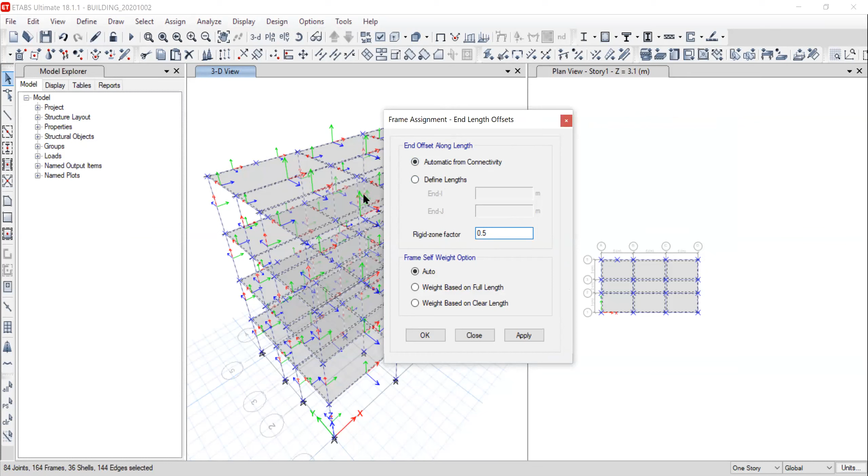Select all, go to assign, frame, then end length offset. Here you have different options: automatic from connectivity, or define length. We are going to consider automatic from connectivity, and then the rigid zone factor, whatever you want to consider. If you want to assign this end offset only for column, select only column. If for beam, select only beams. If for both beams and columns, select both, and then whatever rigid zone factor you want to apply, put it here and say apply.

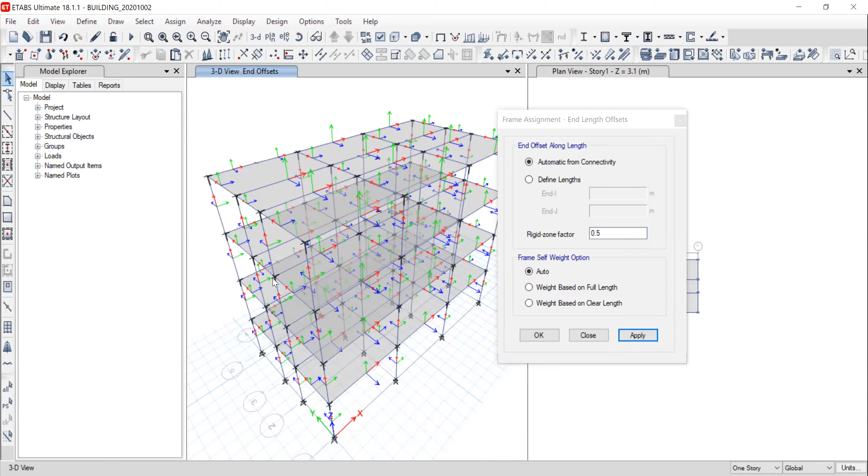So you can see these rigid zones are defined here. I hope that clears your doubt. Next I'm going to show how ETABS has assembled the joint masses. So go run this analysis.

Once analysis is done, go to display, show table. In show table, you will see analysis result, and in analysis result, you will have joint output, and in joint output, there is the assembled joint masses option. So you select that and click OK. You will see the assembled joint masses are provided here in a table. Then you can export this to Excel.

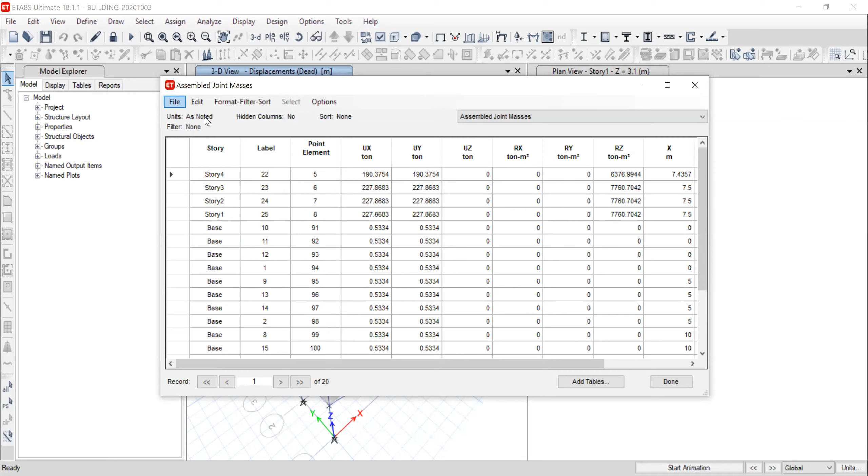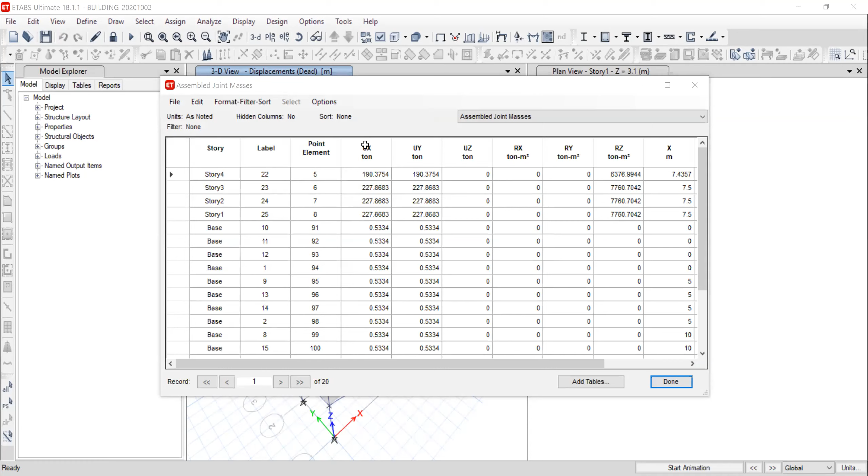Now it is exported to Excel. Let me share that Excel screen. You can see this assembled joint masses at different stories, like story 4, 3, 2, 1, and at base. Because at base we have supports, so at base this mass is assembled at every support. The values provided are in tons, so we can convert that into kilonewton by multiplying by 10. So these values are in kilonewton now, and you can see the mass in x and y direction is the same.

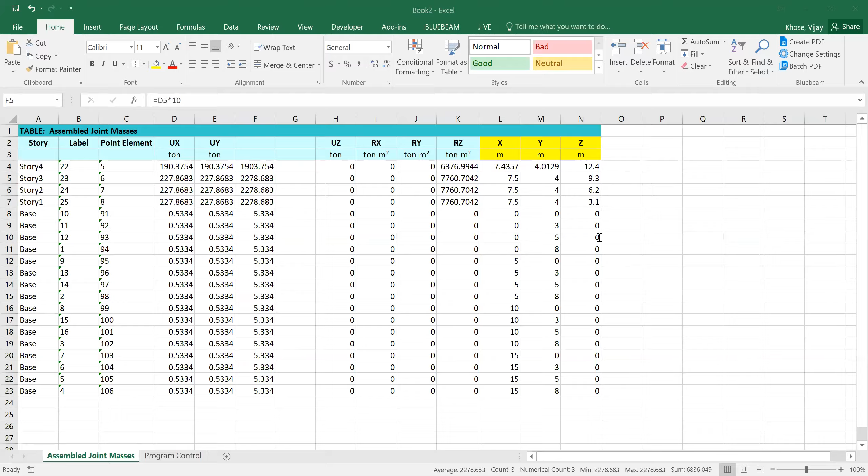So this is your lump mass at the top level at story 4, which is 1903 kN, and at other stories it's 2278.68 kilonewton. If we go to our screen, you can see that at top level it is 1903 kilonewton, and at other three levels it is 2197.22.

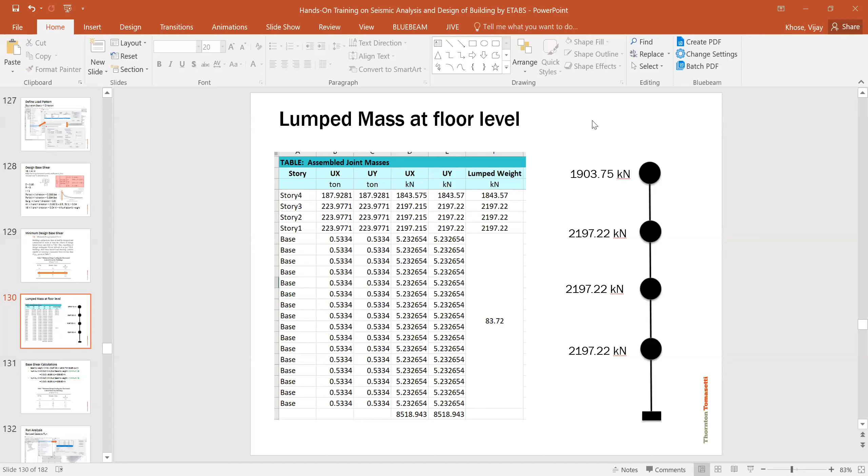So the next thing we have to do is calculate base shear. From here we got how much base shear in terms of a percentage of seismic weight there is.

So we know 4%. Now we also know the seismic weight. Seismic weight is 3 times 2197.22, that is mass lumped at story 1, 2, and 3. And the last one is 1903.75, that is weight at story 4. So total seismic weight is 8495.41.

339.82 kilonewton in x direction, and similarly in y direction we will get this. So this was based on hand calculation. So we know our base shear is 339.82. Now let's go to ETABS.

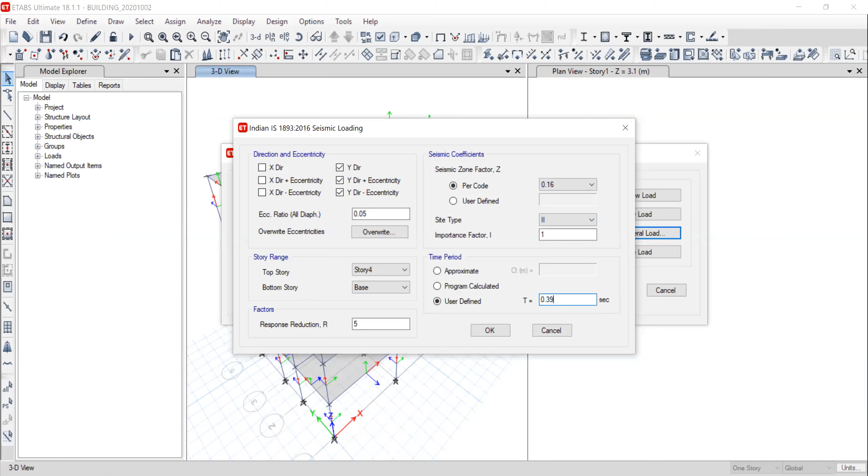Okay, so the equivalent static load case we have defined. Let us run the analysis.

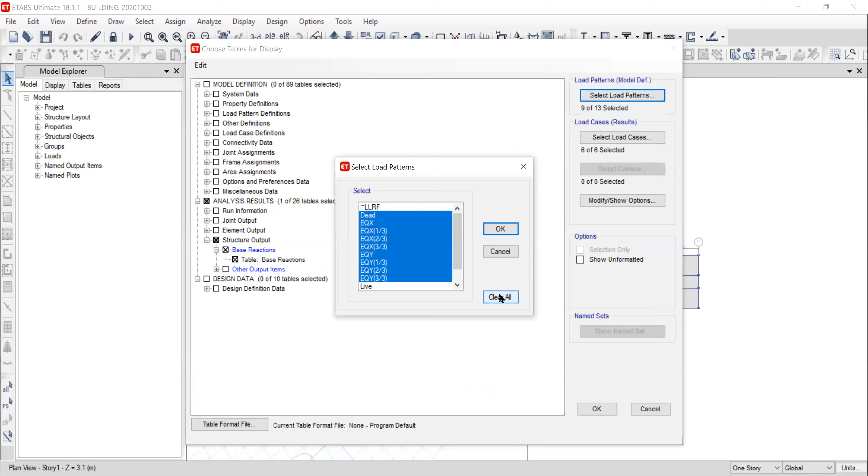Now go to display, show table. In show table, in analysis results, you can go for structure output and base reactions. So base reactions, we are interested in getting reactions for this earthquake in X direction and Y direction.

So here you can see the equivalent static load case in X direction, we are getting 342.83, and as per hand calculation we got around 339, so we are very close. The base shear we are getting due to equivalent static analysis is this in X direction and Y direction. Both values are matching, since there is no change as per hand calc also. So we are good.

So the next step is to distribute this load on the floor level. We calculated this value as a whole, but we have to distribute this load on the floors. So how is the code asking us to do that?

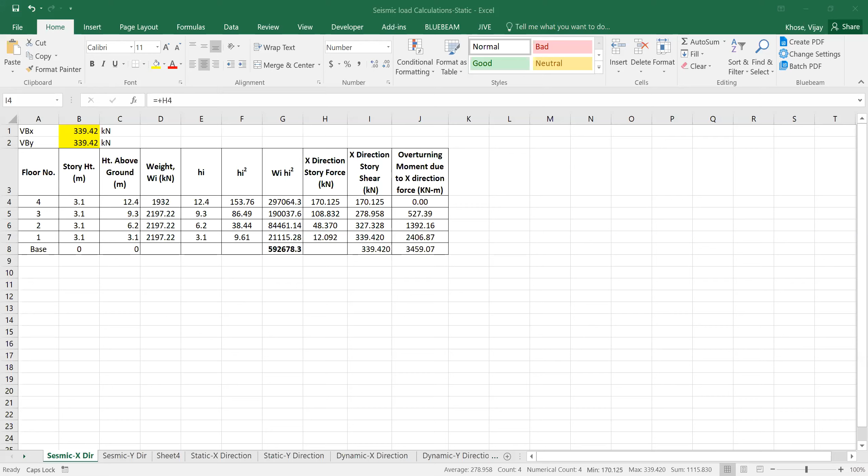Sir, excuse me, that screen is not visible. No, okay, sorry. So go to, sorry, go to display. Now you can see display. Show table. Let me know in case you are not seeing screen.

So I am keep switching screens. So go to analysis result, then in structure output, story forces, and here select only 2 load cases that we are interested in. So you will get that here. You can see the forces are given at top and bottom.

So I am just selecting bottom, and here load case X only, and the story number I'll say. The step number I am not filtering now, but you can see it's 167, and based on hand calculation we are getting similar value 167, 280, 330 and 342. So similar, very close value we are getting.

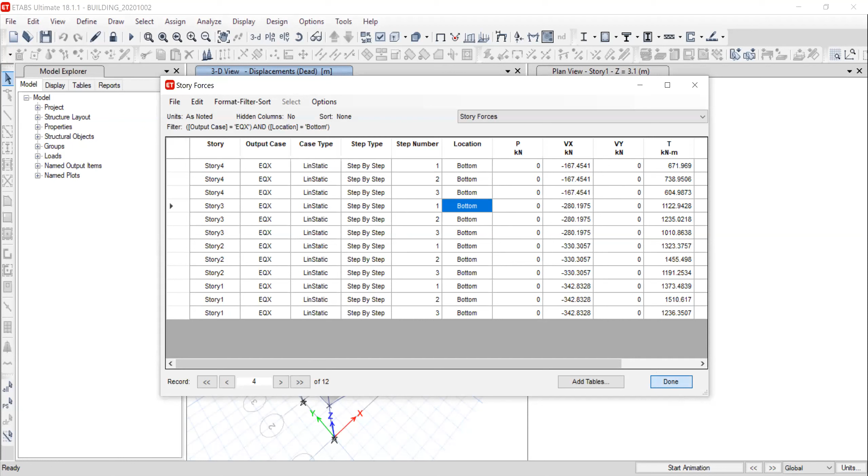So we are good to go. This calculation will be similar for X and Y direction. So this was about the equivalent static method and how force is calculated using equivalent static method and how it is distributed along the height.

So the next is we have to go for the response spectrum analysis. If you see the code, basically the difference between the equivalent static method and the response spectrum method is in the response spectrum you are considering multiple modes, and in equivalent static method you are considering only one mode, like first period. In X direction what is the first period, and in Y direction what is the first period. So that only we are considering, but here we are considering multiple modes.

So the question comes like how many modes we should consider. The code says you consider modes where we have 90% seismic mass participation. So how we can check this?

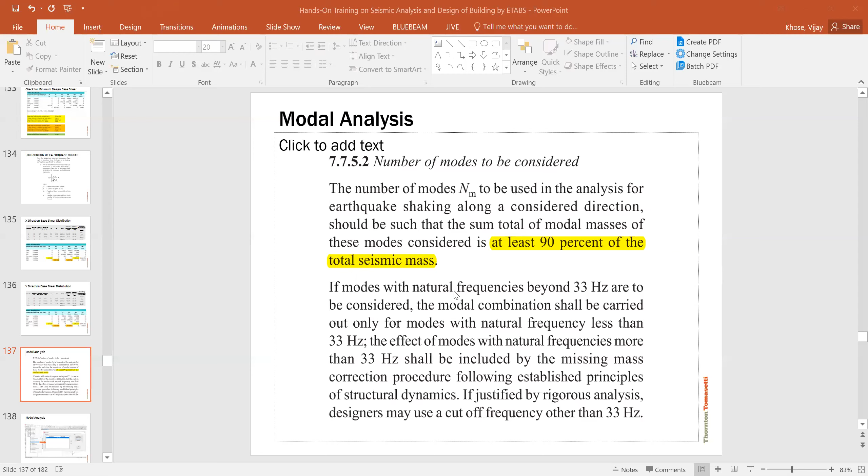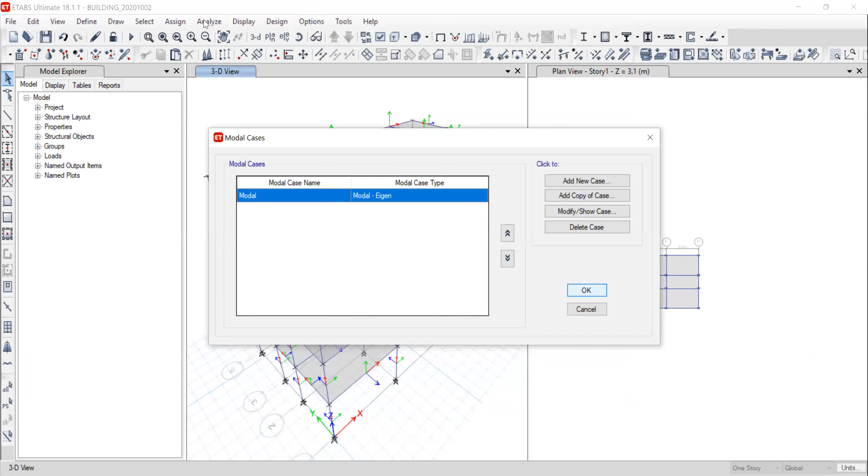Go to ETABS, and here we have to unlock the model. Now go to define, and here you have modal cases. In modal cases, you can see the maximum number of modes. Currently by default it is 12 number of modes. So now we are going to run modal analysis. Go to analyze, set analysis cases to run, and switch on the modal case. So now we can run that.

Once analysis is run, go to display, show table, and in show table in structure output, modal information. So you can see the modal participating mass ratios. Click OK. Here modal participating mass ratios, you will get this number. You can just export it to Excel.

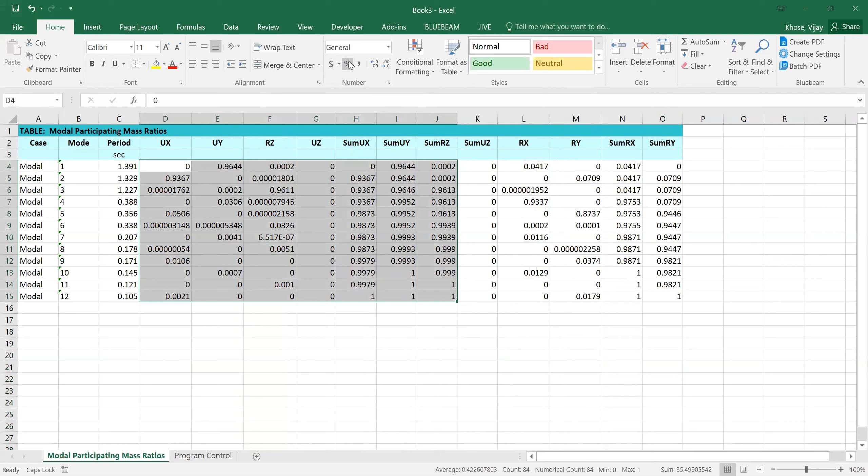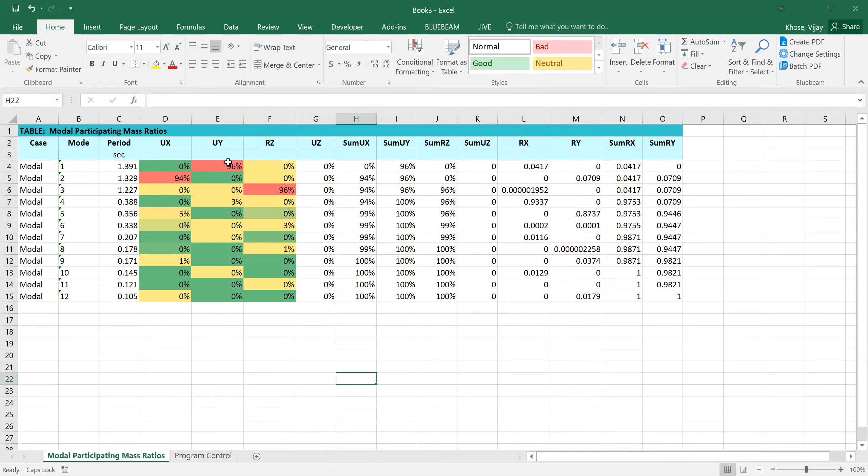So in Excel, here you can see UX participation in X direction, participation in Y direction, and participation in Z direction. So I simply click to this percentage and we can see here I have the participation. The first mode is in Y direction, so participation is 96%. In mode 2 we have 94% participation, and the third mode, that is torsional, that also has 96% participation.

So this way you can see how many modes you require. So whatever modes we have considered, like 12 modes, those modes are good enough. So next one.

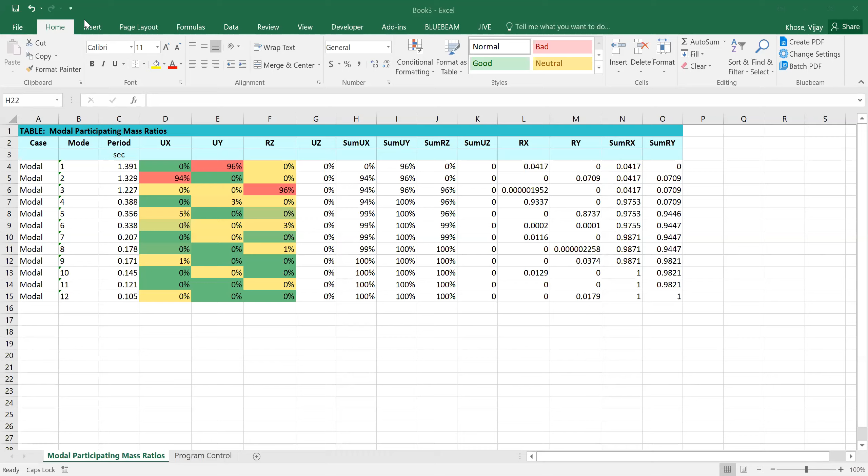So the next step would be to define the response spectrum case. Just unlock model, go to define. In define load cases, we need to go. In load cases, add new load case. So here response spectrum in X direction. In load case type, I can select response spectrum, then add acceleration.

So in X direction, here this is joint U1, U2, U3. The joint local axis is U1 in X, U2 in Y, and U3 in UZ. So here we are doing X, so U1, and here the response spectrum function we define like IS1893 soil type 2, and scale factor should be Z by 2 into I by R.

Just a minute, I will explain this scale factor. This is a very important point. The scale factor has a unit of acceleration and should be consistent with length units currently in use. So you have to ensure which unit you are using, whether meter or mm.

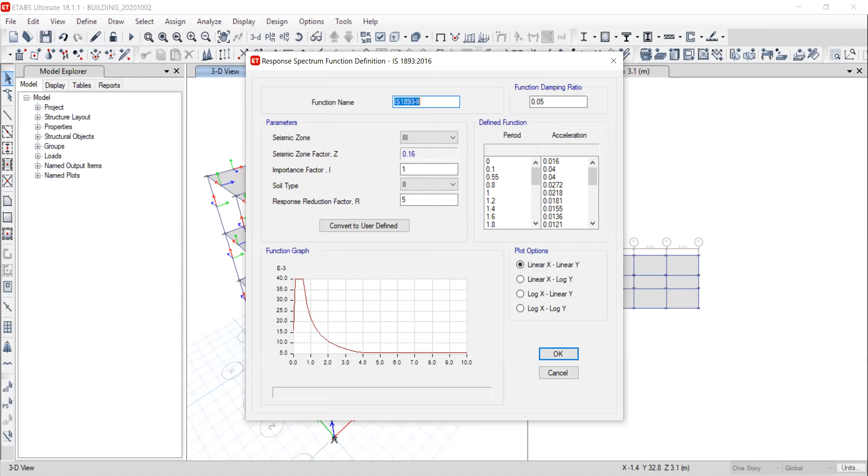So these values are automatically considered here. So we have to only apply this unit, whatever unit you have considered, that length unit, mm or meter. Based on that only we have to apply G, the acceleration due to gravity. So again, go here in load cases, response spectrum. So this factor is whatever is provided that will keep. This is acceleration due to gravity, G,

9.8067. Okay, then similarly add, you can add copy of case, and you can say response spectrum in Y direction. And here you can say U2 in Y direction, you have to do U2.

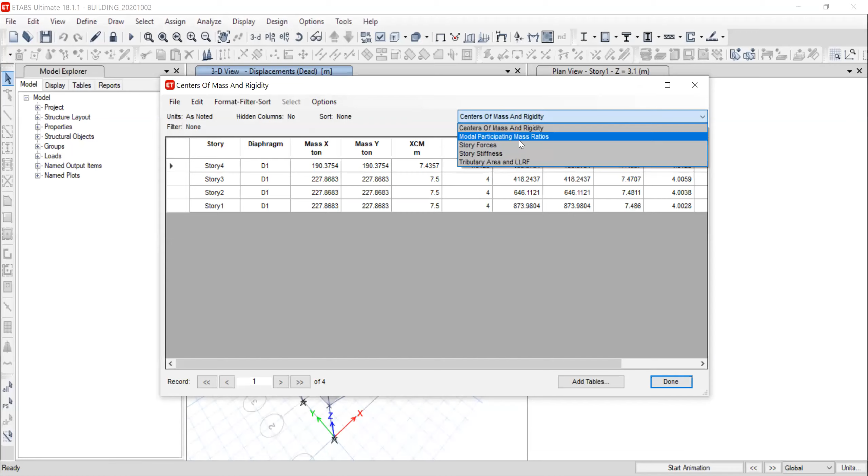Now we can run analysis. And go to display show table. Now here we select 4 load cases. Display show table. In show table, we are going to check only base reaction.

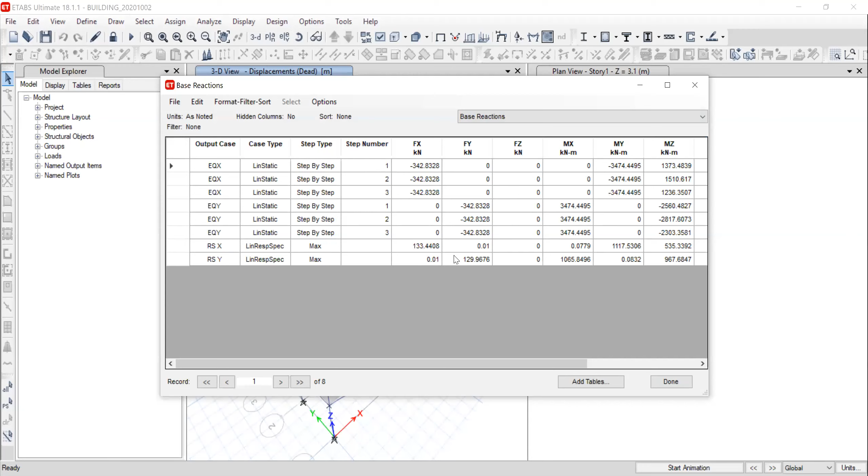So here you can see the equivalent static base shear was 342. Whereas in response spectrum X direction, you can see it is 133 in X direction and it is 129 in Y direction. So what code says about this? So let us go there.

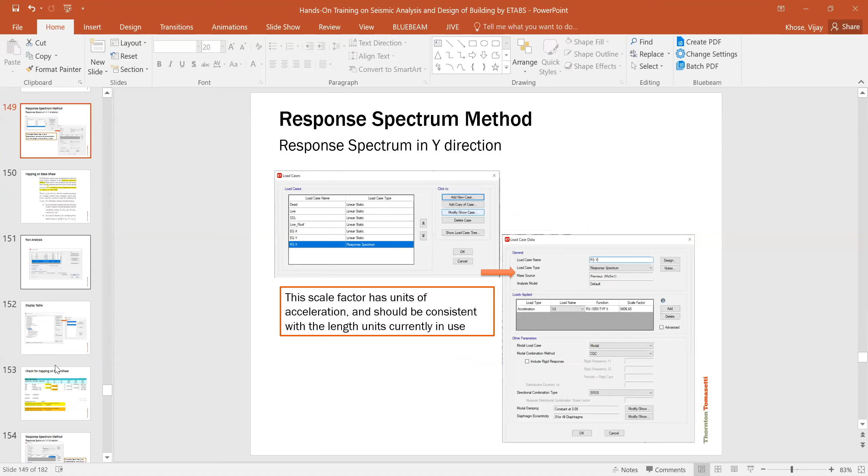Yeah, so there is a capping on base shear. So what is that? What code is saying, like the dynamic analysis may be performed by either time history analysis or response spectrum method. But when either of the method is used, the design base shear VB estimated shall not be less than the code base shear, that is called as VB bar.

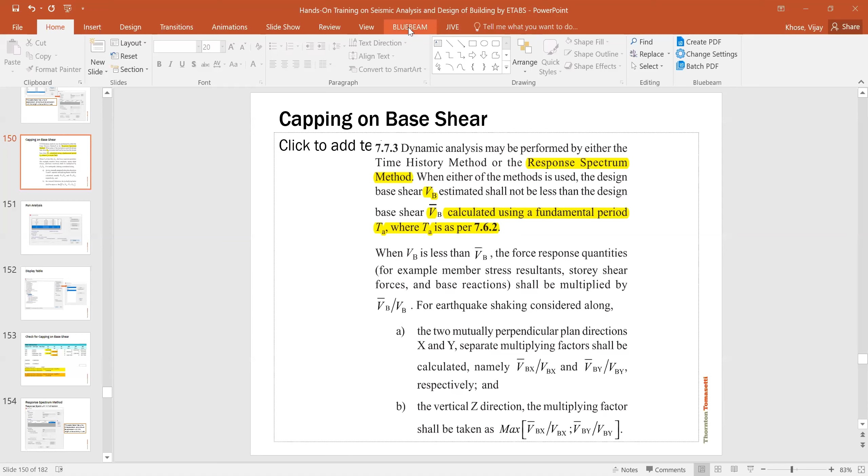So we have to scale it such that our response spectrum base shear is matching with the equivalent static base shear. So if we go to ETABS, here you can see these factors are not matching. So what we have to do, we have to scale that. So if you go here,

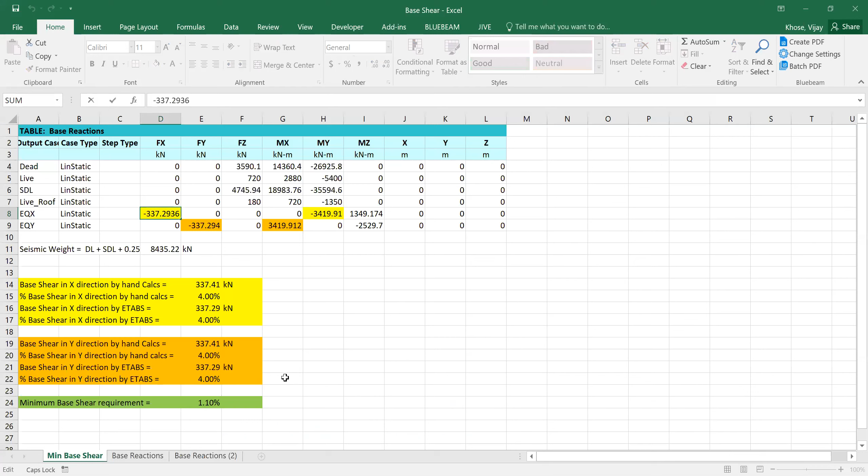If you can say this, so our equivalent static base shear is 342. You can see my Excel, right? So it is 342.83, and this also same.

And this value, how much we have? 133.44 and 129.96. This is 133.44 and 129.96. So these are values.

Now you can see the original scale factor what we have applied is 0.90, sorry, 9.8067, and the modified scale factor in X direction it will be original scale factor into this equivalent base shear divided by response spectrum base shear. So the ratio of this would be like equivalent static to response spectrum is 2.56. So we have to multiply this factor by this. So if you multiply the original factor into this ratio, you will get this.

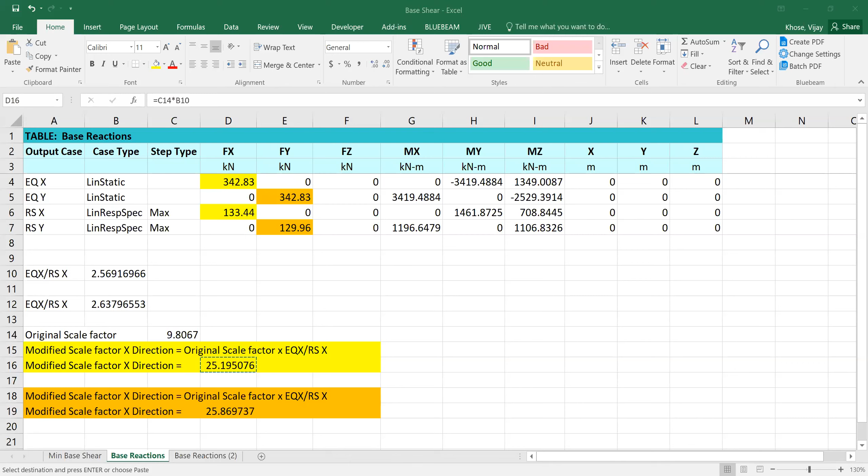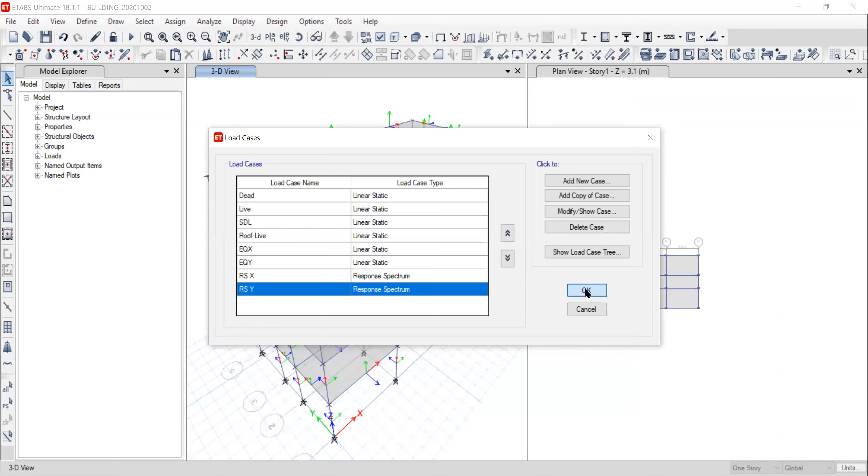Go to define load case response spectrum in X direction, and here you apply that factor. Then again go to Y direction, and whatever factor was there in Y direction you can copy and paste it here. Okay, now we are going to run analysis again.

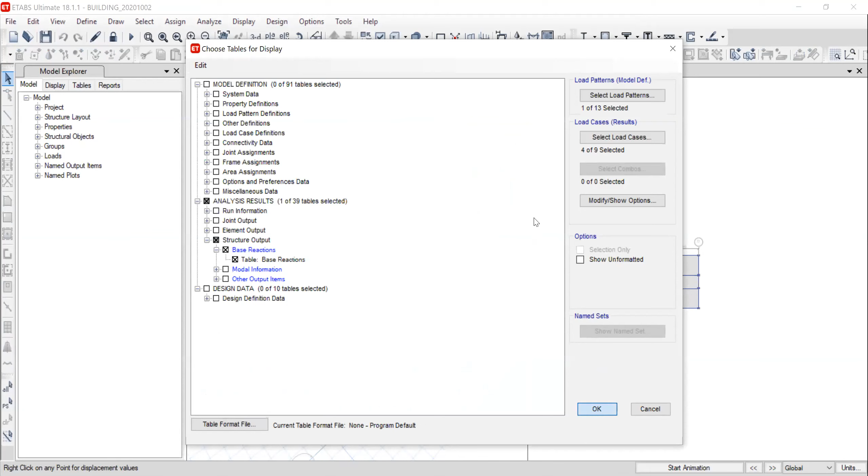And once analysis is run, we can go to display, show tables, and again we are going to compare the base reactions. So here you can see now response spectrum in X direction is 342, and in equivalent static method also we have the same. So similarly for Y direction also.

In the response spectrum we are considering multiple modes, so the response spectrum method is considering the actual deflected shape, and that is more accurate. But you can see that in the equivalent static method, your building would be seeing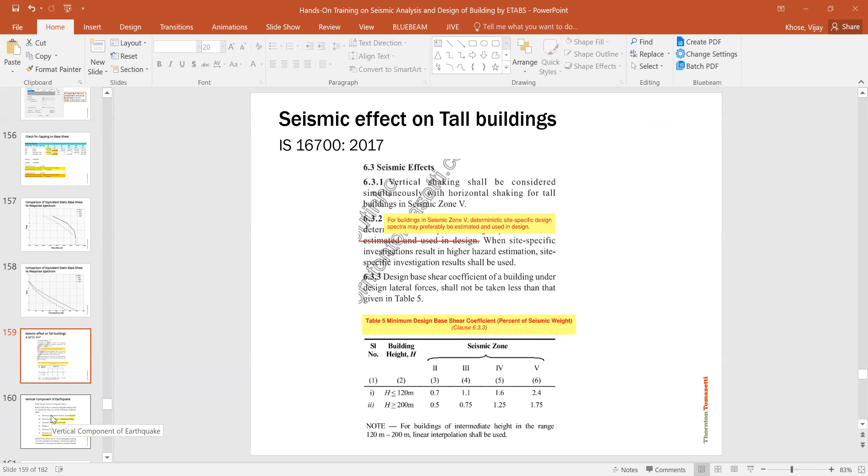Whatever base shear values were provided in IS 1893, those values are applicable for height up to 120 meters. For structures with height more than 200 meters, we have separate minimum base shear values. And if our height is between 120 and 200, we can linearly interpolate.

This is from IS 16700, and here in IS 1893, the code talks about when we should consider the vertical component of earthquake. The effect due to vertical earthquake shaking shall be considered when any of the following conditions apply: when your structure is in zone 4 or 5 - our structure is in zone 3, so this condition is not satisfied. If you have vertical or plan irregularities - we don't have any.

If your structure is resting on soft soil - ours is resting on medium soil. If it is a bridge, or has long span, or has large horizontal overhangs of structural members or subsystems - we are not satisfying any of these conditions, so we need not consider the vertical component. But in case your structure meets any of these requirements, then you have to consider that component.

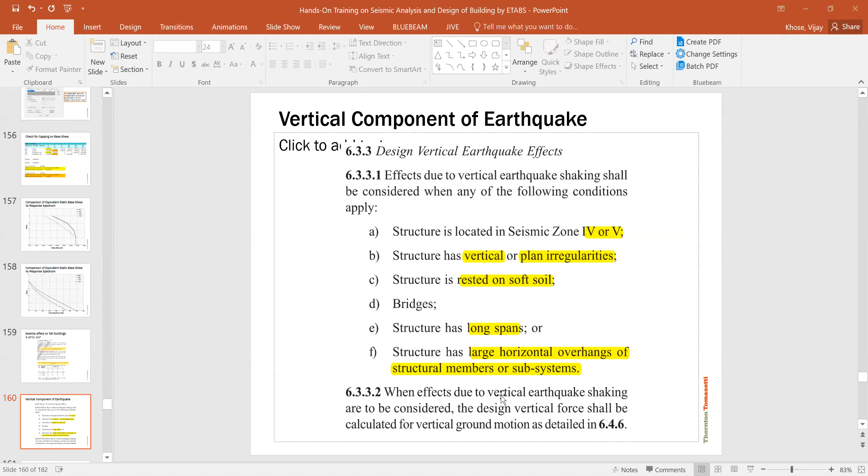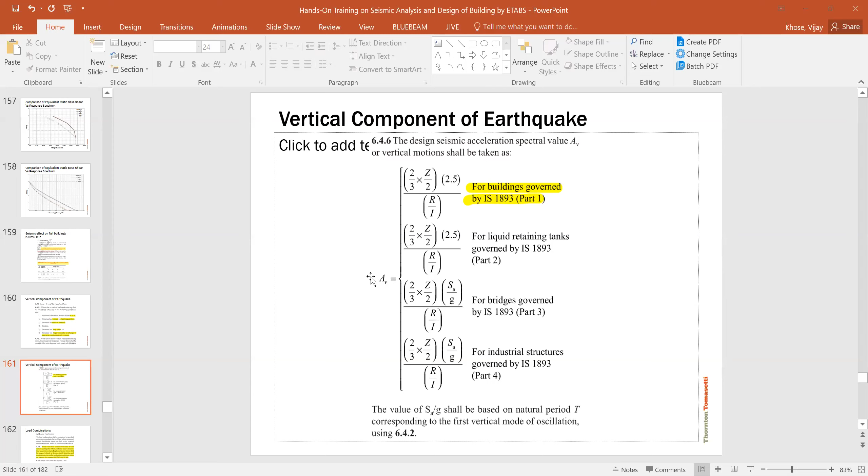So how is that component considered? In horizontal shaking, we used to get the SA by G component based on the period of structure. But here the code says for buildings you consider 2.5, and a 2/3 factor is also applied. You have to use this equation, and based on this you will get the coefficient of vertical acceleration, that is AV. Similar calculation as we did for AH, we have to do for that.

The next thing is load combinations. What load combination should we consider? The code says even when load combinations do not contain earthquake effect but indicate larger demands, the combination including them, the provisions shall be adopted related to design, ductile detailing, and construction relevant for earthquake conditions, as given in the standard IS 13920 or IS 800.

That means let us say your structure is not governed by earthquake - in that case also you have to do ductile detailing as per IS 13920 or IS 800. And then the other provision is the design horizontal earthquake load.

When the lateral load resisting elements are oriented along two mutually orthogonal horizontal directions, full design earthquake load in one direction at a time and not in both directions is considered. So how are we going to combine the two components?

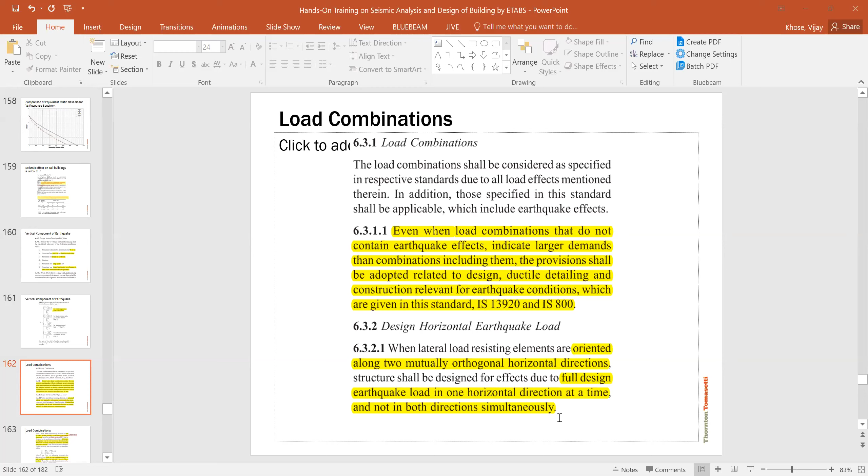We have defined earthquake in X direction and earthquake in Y direction - how are we going to combine them? The code says if you have non-orthogonal members in your structure, then you have to combine that. So how can we combine?

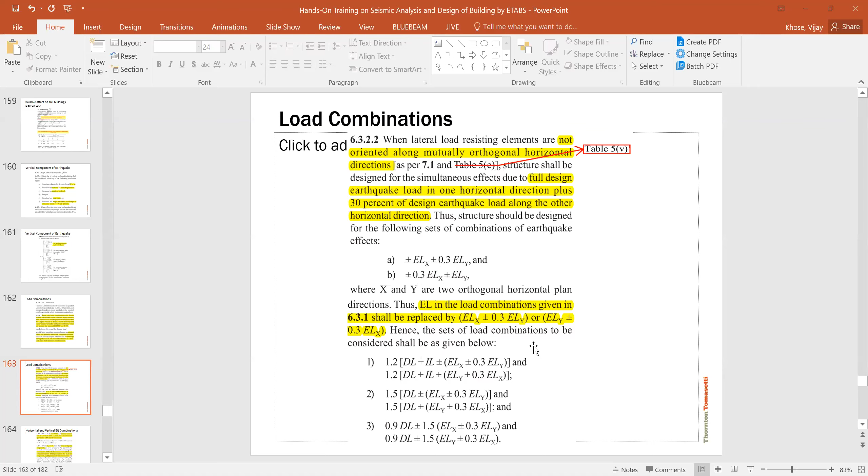If you are considering load in the X direction, then you have to consider 30% component of the Y direction. If considering load in Y direction, then 30% component of X direction. If you have a vertical component also, then for X direction consider 30% in Y and 30% in Z; for Y direction, 30% in Z and 30% in X; and for Z direction, you have to consider other two components also.

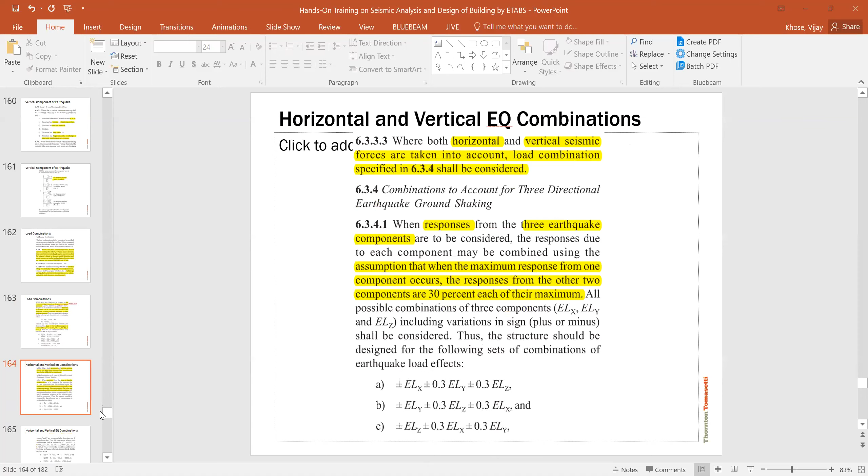So another way to combine this is you can consider the square root of sum of the square. So that will be summation of x component square, then y component square, and z component square. You can consider and do this.

So what will be the load combinations for this as per code? For our structure, since there is no non-orthogonal member in the structure, we can see the load combination will be 1.5 times dead load plus live load. This is the gravity load combination. Then the other combination is 1.2 dead load plus live load plus response spectrum in x direction.

In earthquake load case, there will be always plus and minus, but in ETABS, if you are considering response spectrum load case, this plus and minus is automatically done. That's why we are not doing a minus component here. So even if you do, you will get the same answer. This is in x direction, then same in y direction.

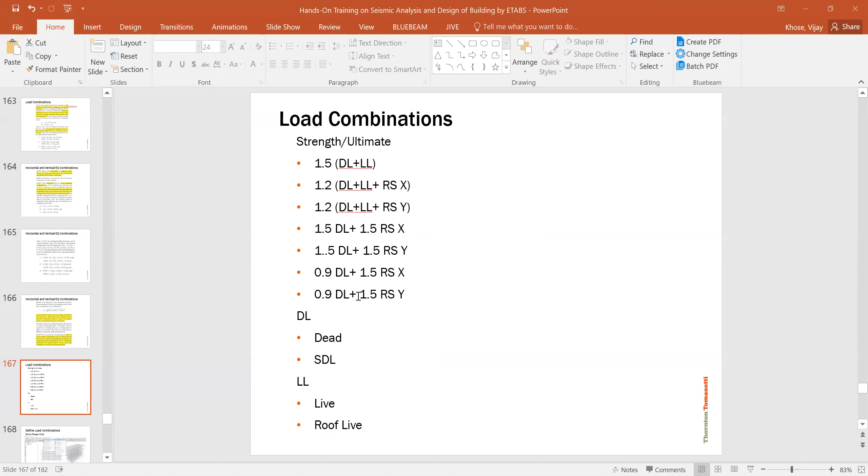Once we are done with what combinations to consider, we can define the load combination. Go to define load combination, add new combinations. Here you can say dead plus live load. Dead, and the scale factor is 1.5. Then second one is SDL, then you can add live load. This is 1.5.

Then you can add another combination, that is 1.2 times dead load plus live load plus RSX. So you can see SDL, the scale factor is 1.2, dead is 1.2, and live load is also 1.2, and response spectrum in X direction is also 1.2.

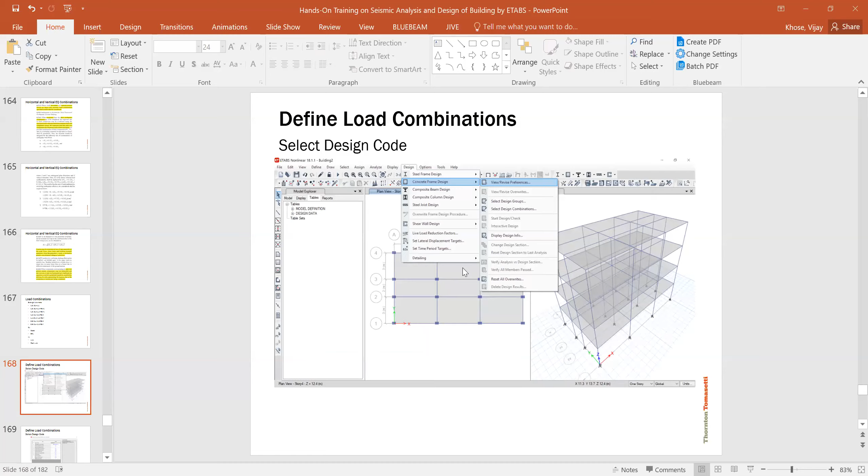Yes sir, yes, so basically what we have to do, add new load combination, and I will demonstrate one more. So now we have defined 1.5 times dead load plus live load, 1.5 times dead load plus response spectrum in x and response spectrum in y.

To add a new combination, you can add new combination, and then the next combination is 0.9 times dead load plus 1.5 times response spectrum in x direction. Here you can say the scale factor is 0.9. This SDL also comes under dead load, so 0.9. Then add response spectrum in x direction, and this is 1.5. So this is one load case.

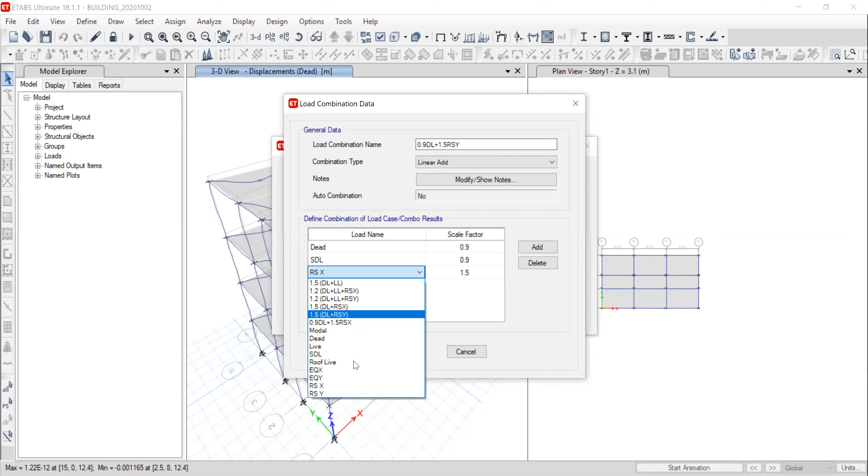So you can add a copy of this combination, change this to y, and here you can say change this to y. Okay, so the combinations are defined.

So the next part is deformation. Deformation for RC building shall be obtained from the structural analysis using the structural model based on section properties. Whatever section properties are provided, we have already applied that.

What is the limitation on the story drift? The limitation on the story drift is 0.004 times the storey height. And one important thing here is under the action of design base shear, the VB with no load factor shall be considered, so all the partial factors of safety should be 1.

Here you can see the load combinations for the drift check. You can have 1 times dead load plus live load, then 1 times dead load plus live load plus response spectrum in x direction, similarly for y direction. And the other would be 1 times dead load plus 1 times response spectrum in x direction, similarly we can do for y direction. So these combinations we should use for the deformation check.

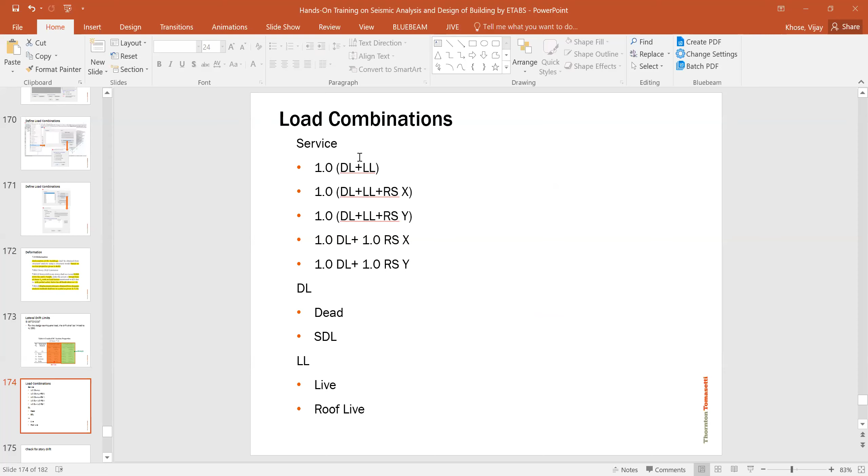Also one important thing: the displacement estimate obtained from the dynamic analysis methods shall not be scaled. You remember we compared equivalent static base shear and response spectrum base shear, and that time the response spectrum base shear was less, so we applied some modification factor. This modification factor need not be applied for getting the deformation.

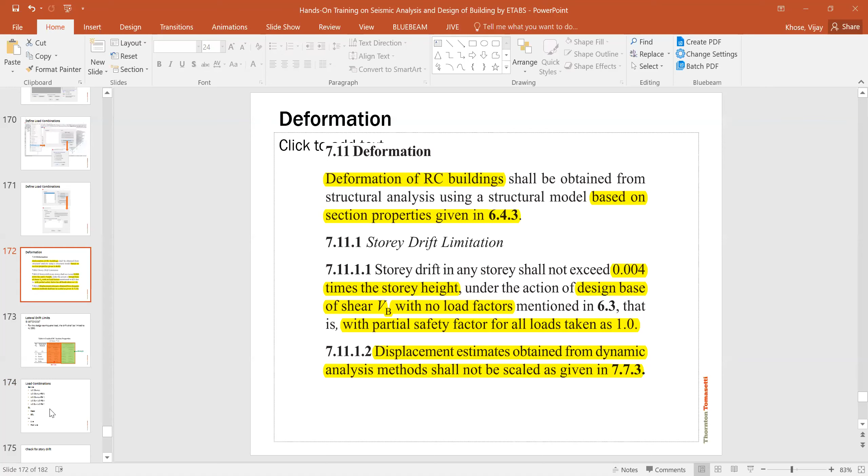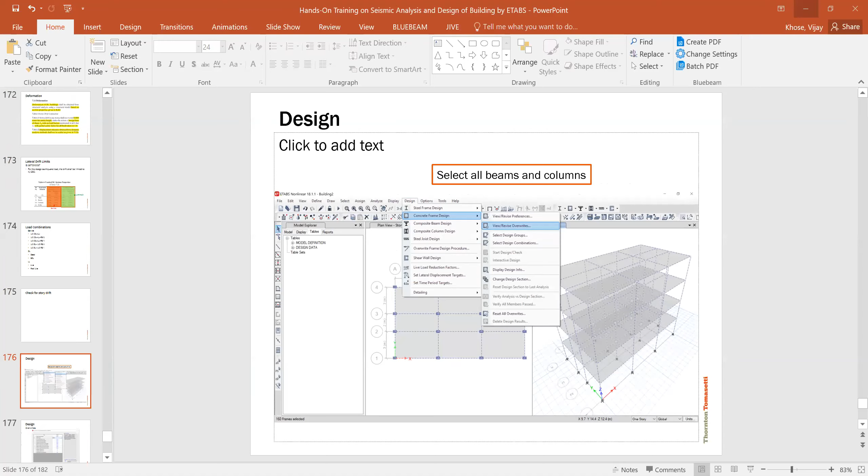Okay, let me demonstrate how to do design here. Once we are done with all this, we have to run the design. In design, you go to design, and you can see my screen, right? In design, you can go to concrete frame design, view, revise preferences.

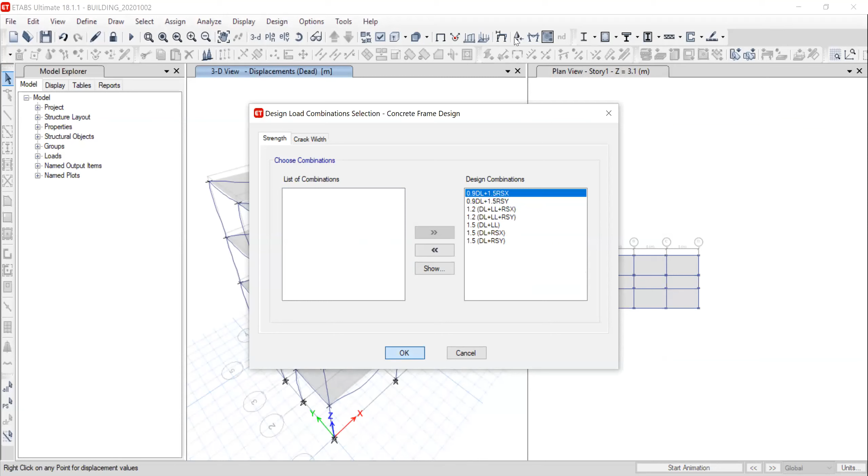Here you can select the appropriate code, and if you want to change anything you can. This is the default property, so by clicking here you can select the code you want to design for. Again, go to design, concrete frame design, and select design combination. So whatever design combination you want to design for, you just click here and move them to design combination. The next step is to start/check design.

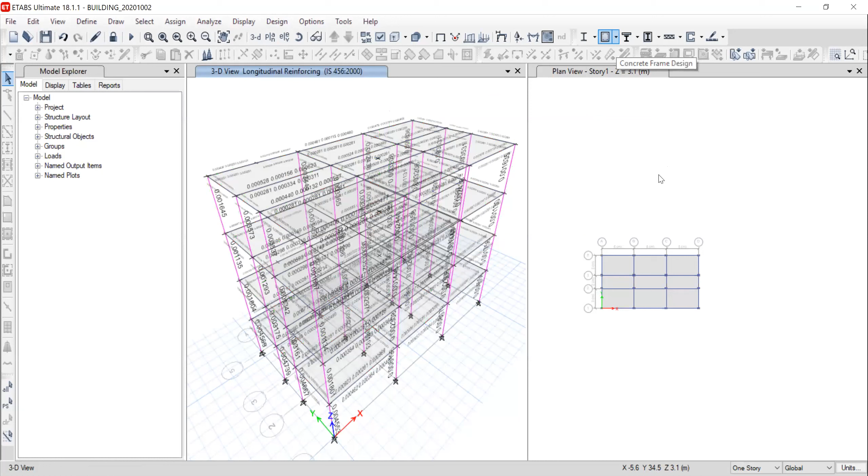You can also access this concrete frame design using this button. Here you can see the display design info, and this is longitudinal reinforcing. You can change this to percentage, apply here, and go to plan. Now you can see these are the beam reinforcements: this is top-left, top-mid, and top-right, then bottom-left, mid, and right. So for all the beams, you are getting this reinforcement percentage.

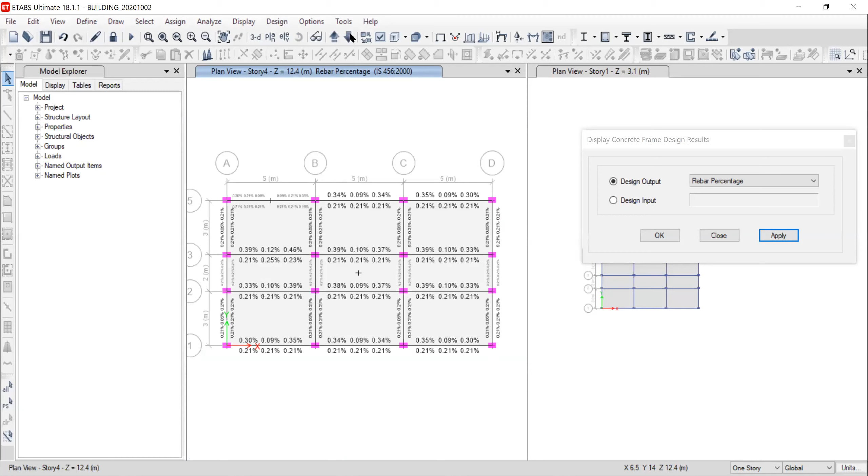Then you can see the shear reinforcing for beam. This is the ratio of area of shear reinforcement divided by the spacing of reinforcement. Since the unit is in meter, we are seeing this... sorry, mm, okay.

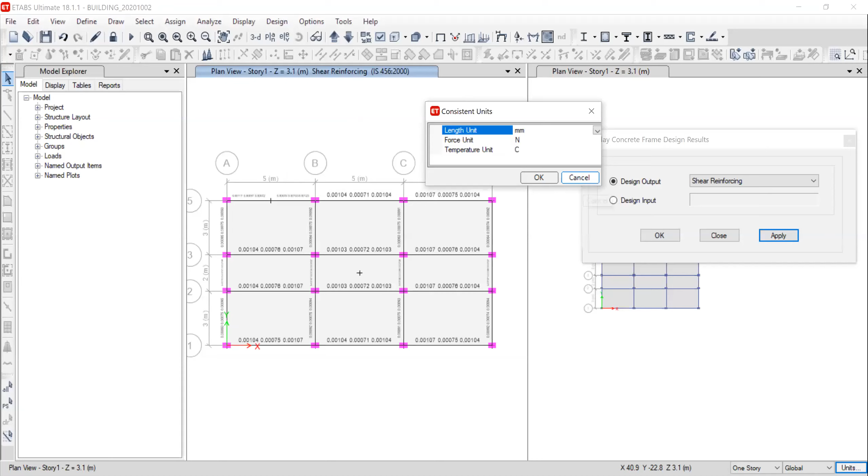So now this unit is changed to mm, and you can see this is your ratio. Let's say you have a two-legged 8mm stirrup, so that area would be 2 into 50 is 100, divided by spacing. If you do 100, then the ratio will be around 1. So accordingly, you have to provide the number of legs and the spacing.

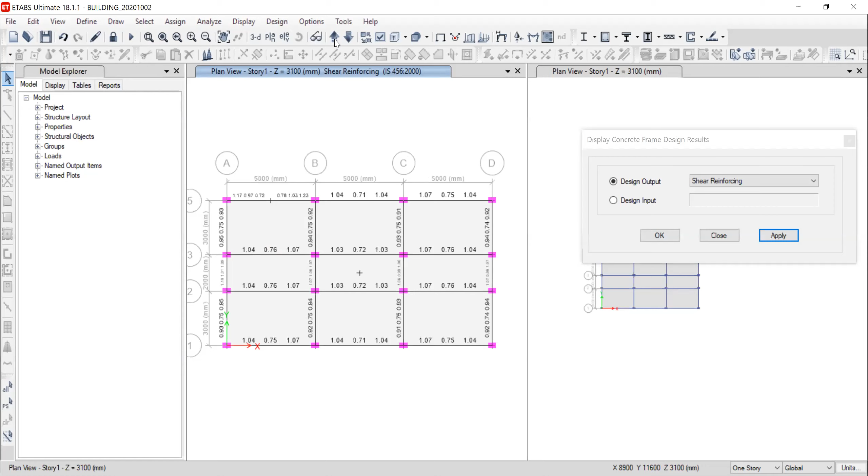So this was about beam. If you go into elevation, you can see reinforcing for the columns also — it is provided. And if you change to rebar percentage, you can see the percentage of reinforcement in column.

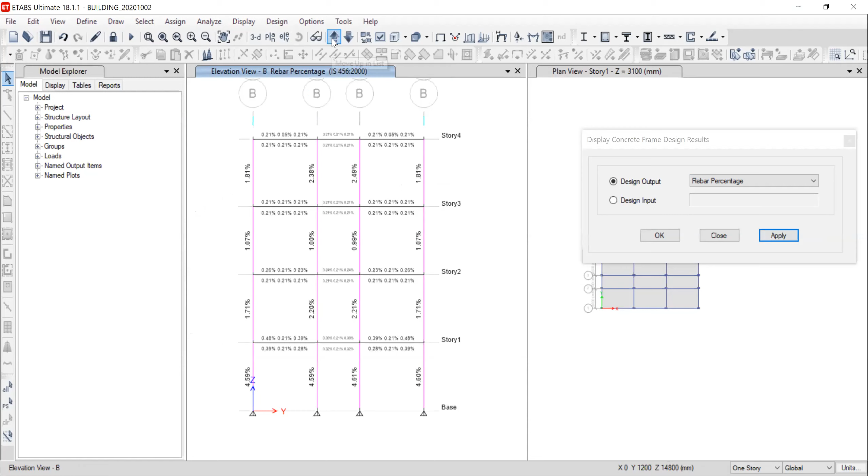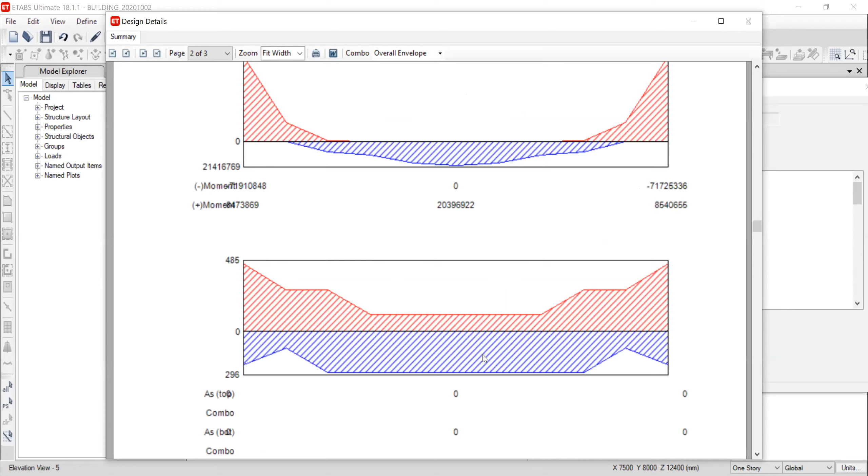You can click on any beam and you will see the detailed result here for each combination and each location. You can see what is the capacity and what is the demand — this is the requirement and this is what we have provided. That report you will get for the given combination.

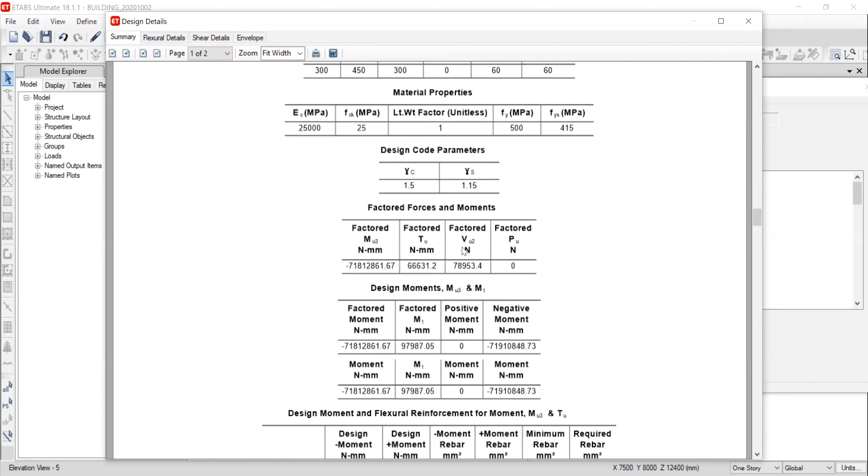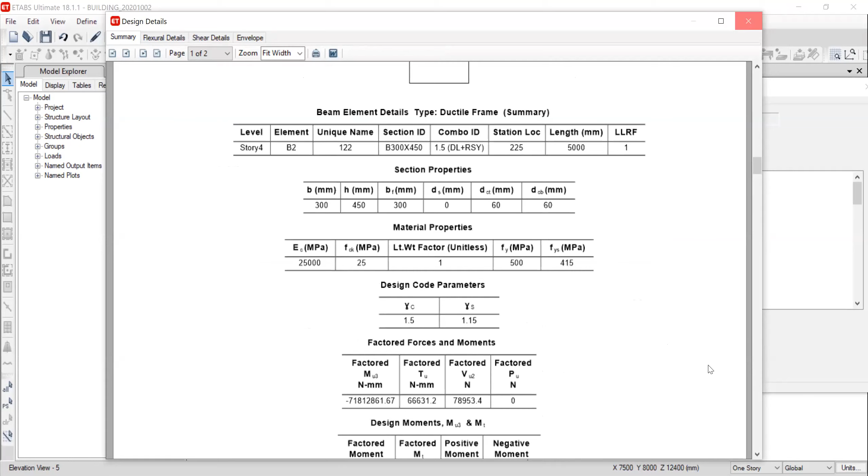You can see details also, like what sizes are considered, what grade of concrete is considered, what forces we are seeing, and what the rebar requirement is. So that information you can get here. So this was about the design.

So I want to show you one more thing. Let us convert this model to, let's say, service. As we discussed, we need to calculate the deformation with the unscaled base shear.

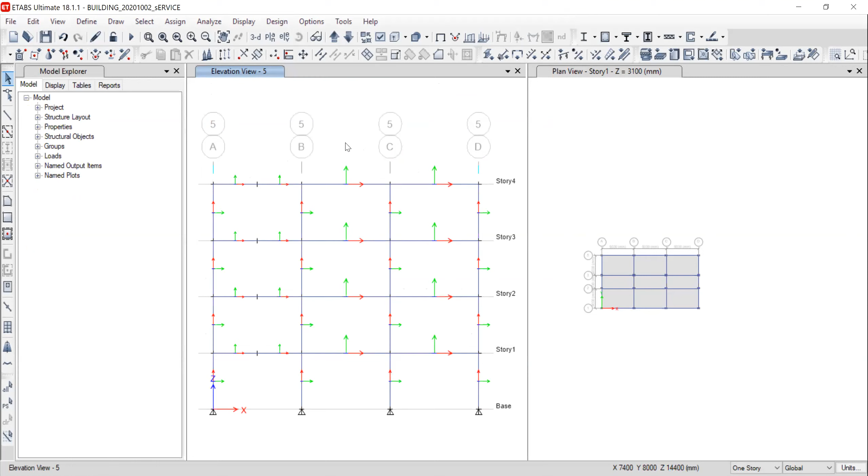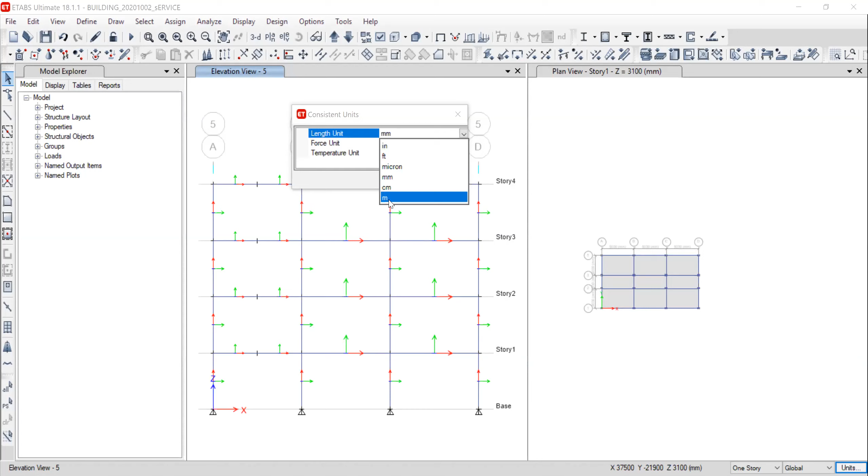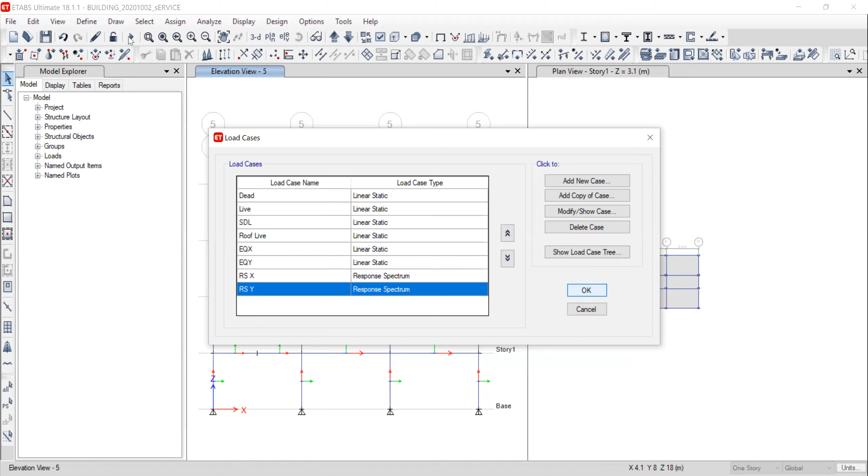So we can go to define cases and response spectrum, and change the scale factor to the original scale factor. Go here, and this was 9.8067. Then you can do also in Y direction. Now you can run the model.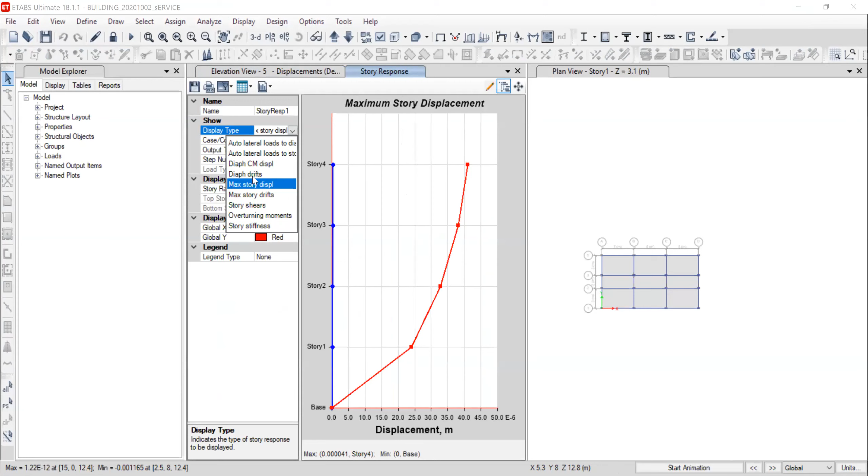Once the model is run, you can go to display and the story response plots. Here you can select the load case — sorry, what display type you want. I want the diaphragm drifts, and the combination you can take.

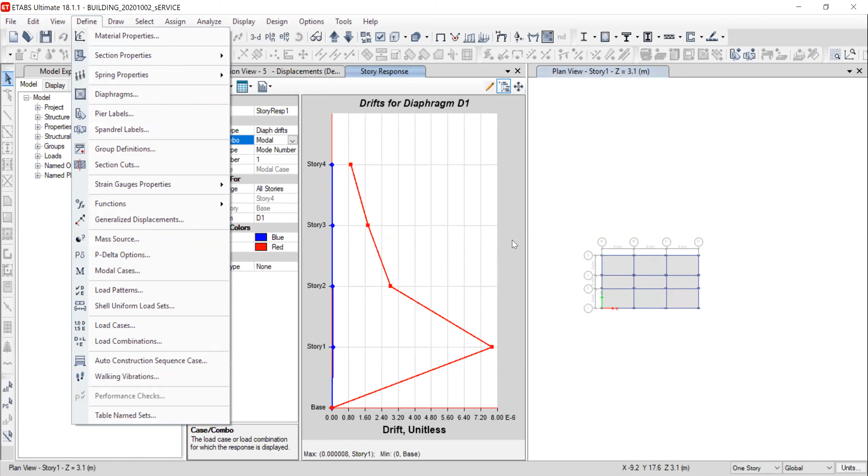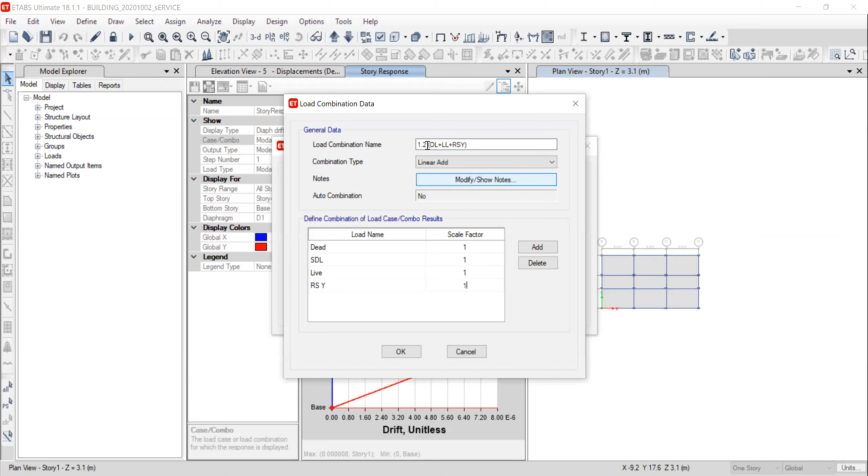But we also need to define combinations. Let's go to combinations, and here we need to change it to 1, one, 1. Okay, and here also we need to change it to 1, 1, 1. So this we don't require, and this we have already defined.

Now here, diaphragm drifts for the combination we want — let's see this in X direction. You can see your story drift is 1.5 into 10 power minus 3, that means it is 0.0015; this is the maximum. For the next direction we can see other combinations also — here it's around 1.35 into 10 power minus 3, meaning it is less than 0.004. So we are okay in X direction.

We can also check in Y direction. It is around 1.7 into 10 power minus 3, so we are less than 0.004. You can check for other combinations also.

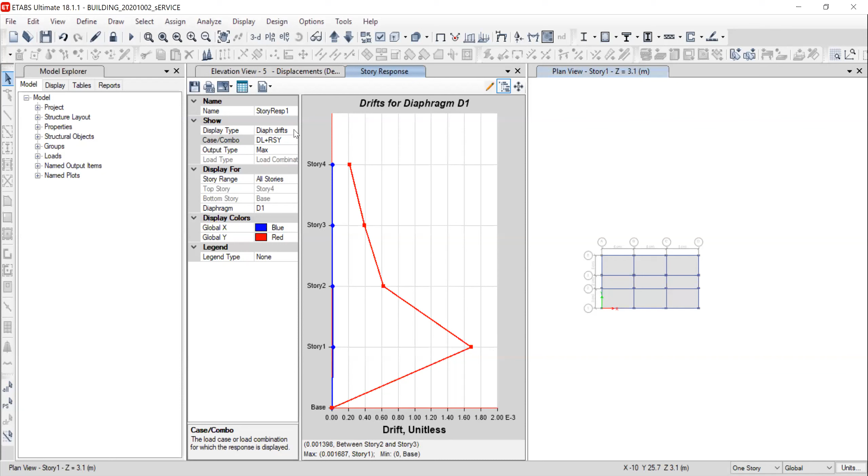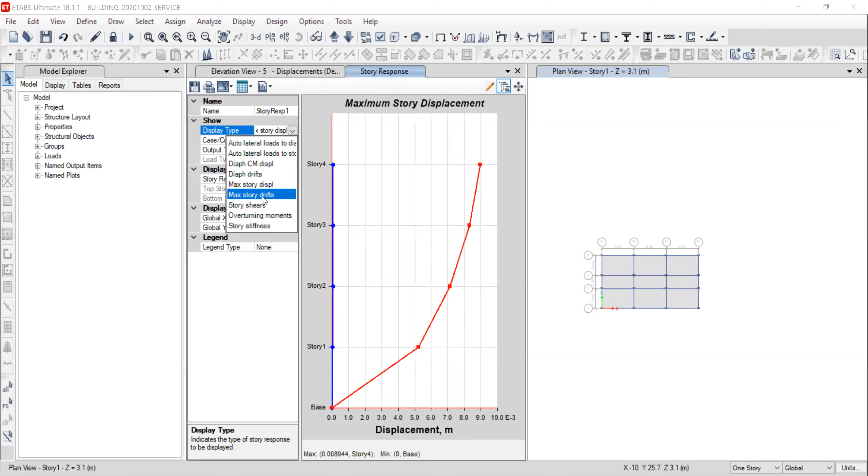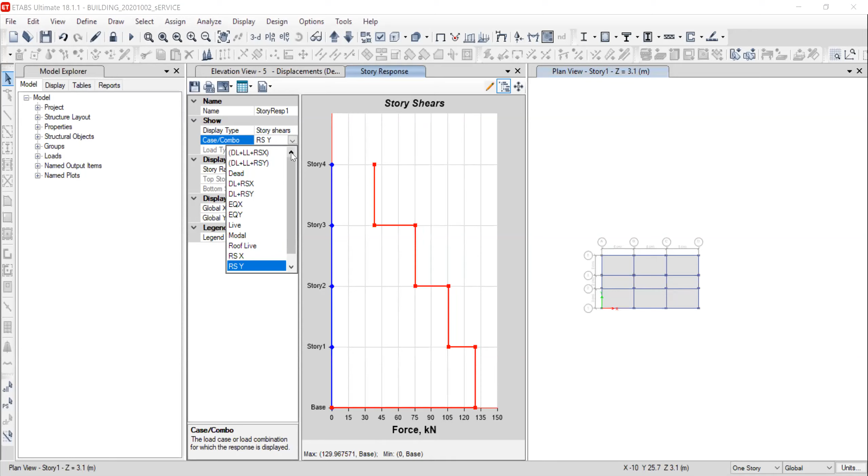So it is similar. Here you can see the maximum story displacement, the maximum story drift, and the story shears for the equivalent static load case and the response spectrum load case. So using this, you can check for the different load cases and different responses.

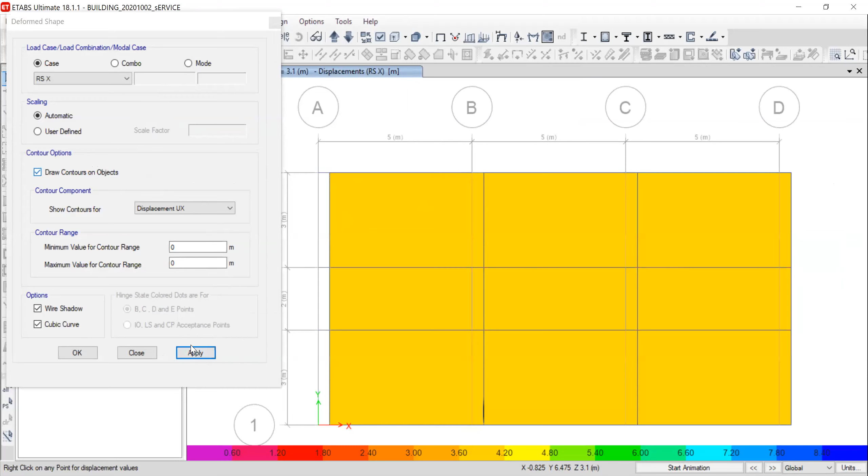So one more thing I would like to show you. If you go to plan, here you can see displacement, let's say response spectrum in X direction displacement. Let us switch on. Now here you can see the displacement in X direction. It's 0.004. Here also 0.004, and here also 0.004 in X direction.

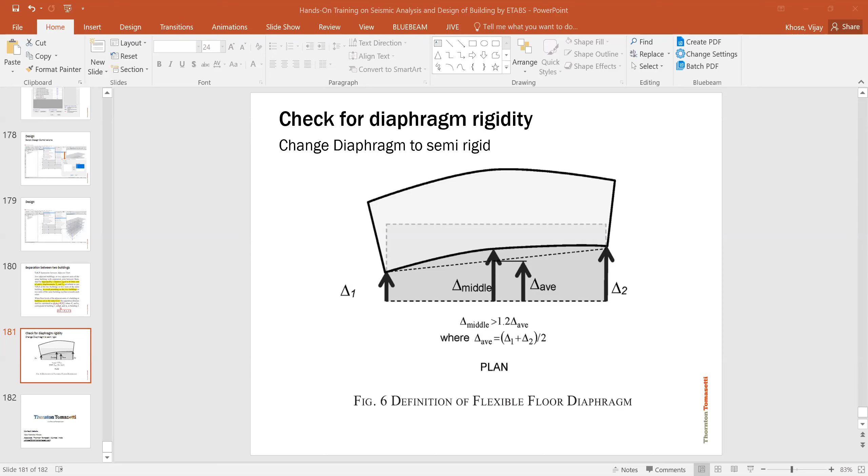So we have assumed that our diaphragm is rigid, but we have to verify whether that is rigid or not. Based on this, you have to see what is delta 1, delta 2, and delta middle. If these are different, then we have to calculate the average. But if you see in our ETABS in X direction, you have uniform displacement, so I will say our diaphragm is rigid in X direction.

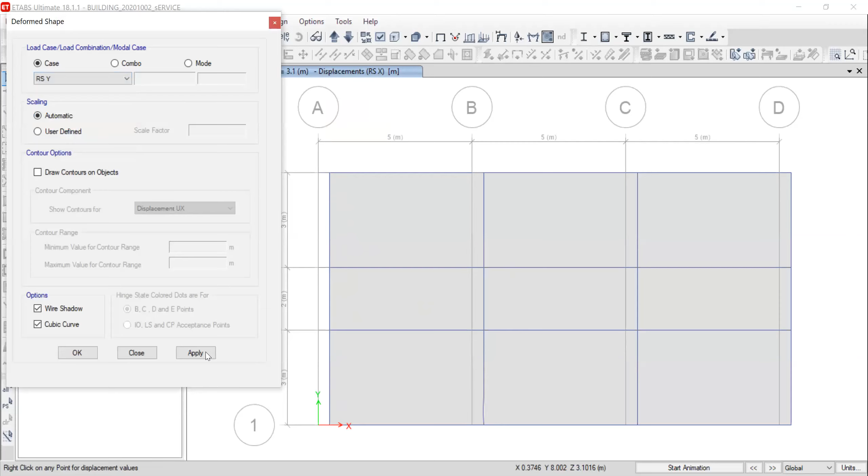So if you see in Y direction too, here you can see this is 0.005, this is also 0.005, and this is also 0.005, and this is also 0.005. So it's very close. So in Y direction also our diaphragm is rigid.

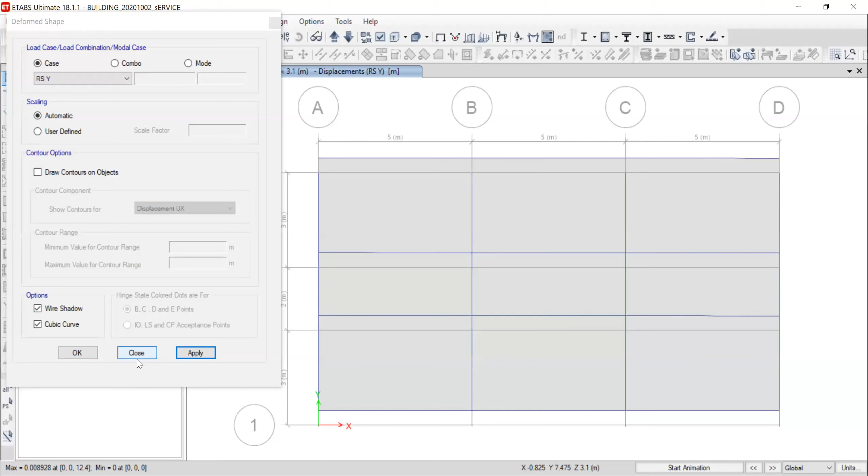I think I am done. So if there is any question, let me know. I think there was a question: can you explain the procedure to develop a site-specific response spectrum?

The procedure to develop a site-specific response spectrum: first, you have to get details such as what soil type is there. You have to do soil exploration if it is available; otherwise you can use code. Based on that, you get the site class. Then you have to find out the faults in that area, how many faults there are, and what potential earthquakes those faults can create. Based on that, you will do either deterministic or probabilistic seismic hazard assessment. Based on that, you will get one PGA, peak ground acceleration for that site, and based on that you can plot a response spectrum. These are simple steps I have shared, but you have to refer to some books, like Kramer's book, Geotechnical Earthquake Engineering. You will find that procedure there.